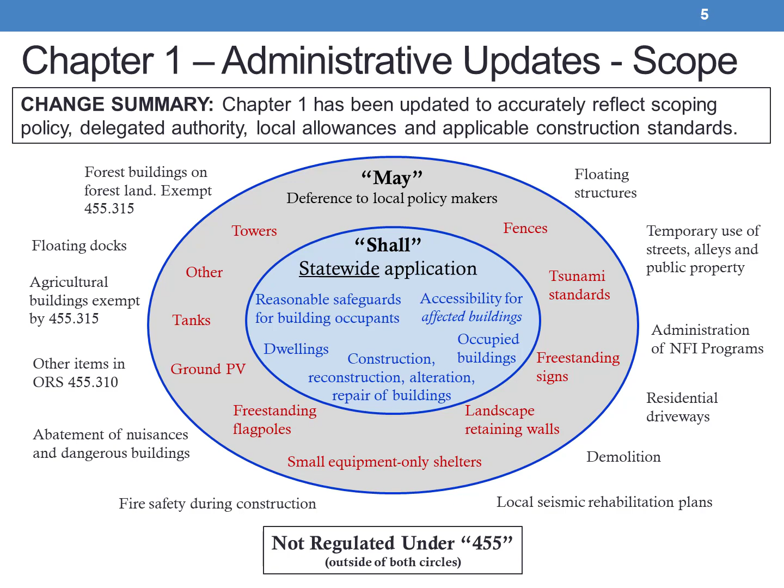It's important to note that both the shall and the may categories here fall under the division's regulatory scheme. While providing for local delineation in the may category, all work identified in either of the two ovals must comply with the respective construction standards of the State Building Code. Items outside both ovals do not fall under the authority delegated by the division. This includes dangerous building ordinances, local seismic rehabilitation programs, demolition, and participation in NFIP.

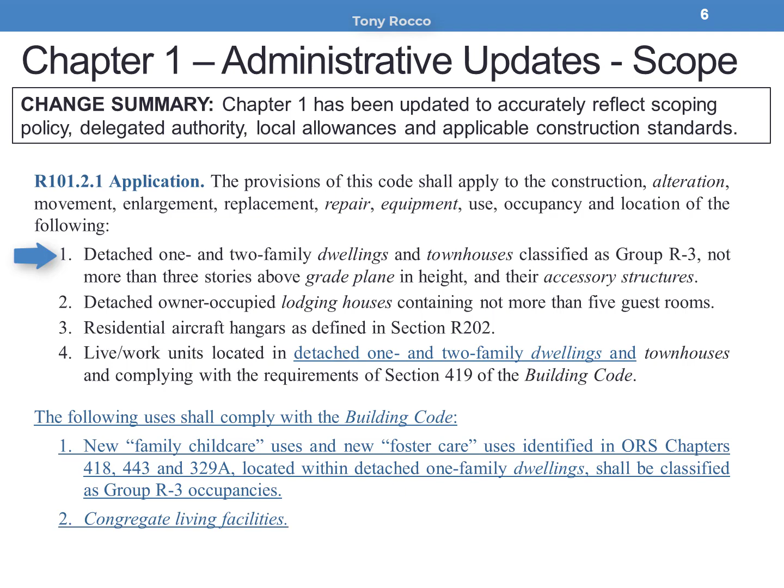As part of the Chapter 1 update, the scoping language has been revised. The ORSC governs detached 1- and 2-family dwellings and townhouses not more than 3 stories above grade plane in height, and their accessory structures. The definition of townhouse is particularly vital when considering its application.

Owner-occupied lodging houses with not more than 5 guest rooms. This use is also specifically covered by the exemptions from accessible design under public accommodations as defined in ORS 447.

Residential aircraft hangars. And live-work units located in detached 1- and 2-family dwellings and townhouses where designed to meet Section 419 of the Oregon Structural Specialty Code.

The following uses are required to comply with the OSSC and may not be constructed under the ORSC. Certified and registered child care facilities and foster care uses identified in Oregon Revised Statutes 418, 443, and 329A.

When permitted by licensure to be located in a detached 1-family dwelling, these uses shall be considered Group R3 under the OSSC application. And congregate living facilities.

These facilities would be assigned the occupancy classification they most nearly resemble based upon the proposed use. Congregate facilities may include various Group R or Group I divisions.

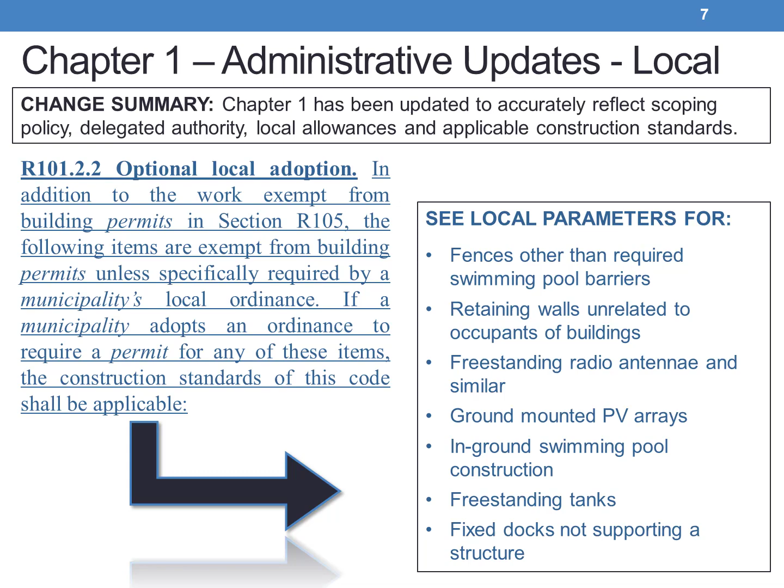but may not be reasonable in a rural area of our state. The intent is to provide local flexibility for addressing community-specific needs as determined by local policymakers and local elected officials.

A significant change occurs in section R102.7 and the creation of new subsection R102.7.2 regarding repairs. This subsection is intended to align the ORSC more closely with the long-standing OSSC code path for the correction of damage

for legally existing buildings. A critical consideration is that the owner of the ORSC governed structure, which was a victim of damage, will have a level of reasonable flexibility to consider when preparing to correct the damage.

Within that reasonable flexibility, specific minimum safeguard elements are required to be included where necessary. The overarching key is that the repair activity cannot make the building any less conforming than the building was prior to the repair activity being undertaken.

Standard and routine repairs, which are exempt from permit, are appropriately covered by section R105.2.2 and are not contemplated by this section. This section covers those repair activities which would require building permits and involvement by the local jurisdiction.

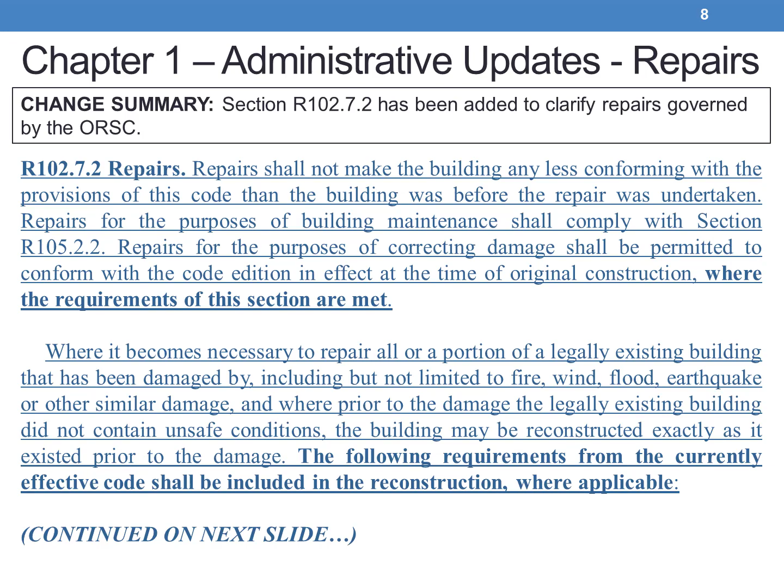Repairs for the purposes of correcting damage shall be permitted to conform to the code in effect at the time of original construction where the requirements of this subsection are met. The subsection then lists requirements from current code to be included in the repair activity as applicable.

The 8 items listed must be considered in the damage correction. Repair to replace structural elements must comply with the loading and design criteria set forth in Chapter 3, or to the maximum extent practical as further approved by the building official.

Smoke alarms in accordance with Section R314, CO alarms in accordance with Section R315, guards and window fall protection in accordance with R312, hazardous glazing locations in accordance with R308, emergency escape and rescue openings in accordance with R310.

energy compliance via the existing Chapter 11 path, and floodplain construction requirements where determined by the floodplain administrator.

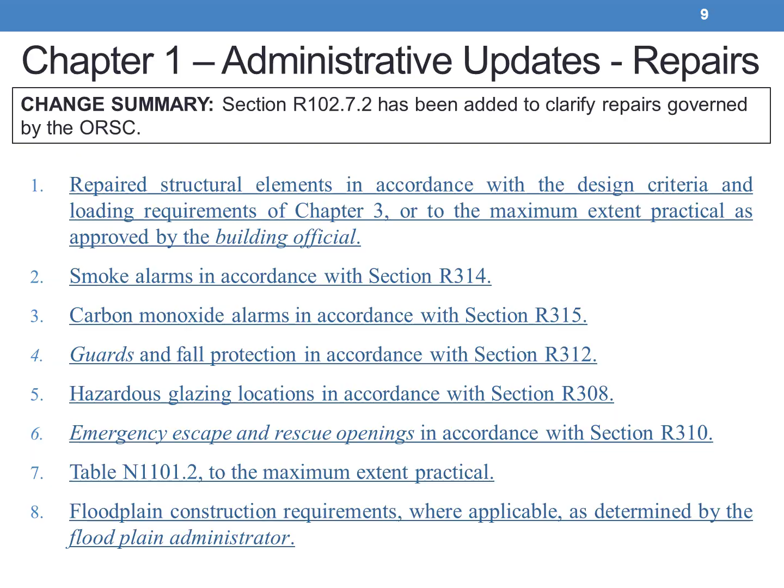Where one or more of these items is not in play based on the proposed work of the repair, it is not required to be provided in the damage correction. Such repairs are not required to conform to other new construction requirements.

Where unsafe conditions existed prior to the damage occurring, the building official has the authority to make all determinations regarding correction of those unsafe conditions.

The majority of significant repair and/or reconstruction of ORSC-governed structures may be guided by considerations well outside the state building code, such as insurance or desired homeowner modifications.

Where modifications are planned by the owner, the compliance path for alterations would apply to all elements modified from the original legally existing design.

The intent of this provision is to ensure that safeguards of current code are provided in the design while allowing for some design flexibility for those victims of damage.

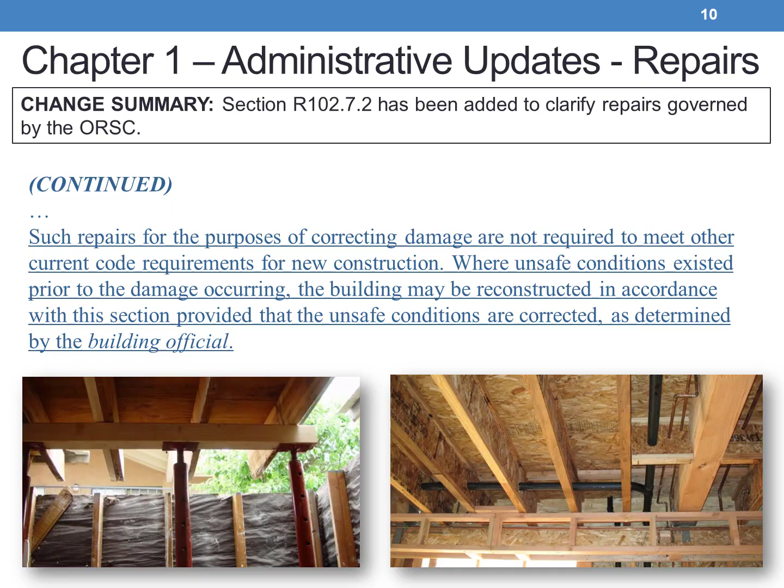The long-standing statutory exemption of ORS 455.310 regarding non-bearing partitions and its inclusion in the list in section R105.2 of the ORSC has led to misapplication and customer delays.

This new language is intended to clarify that when a new habitable space, toilet, or bathroom is created, a building permit is required to verify the design and dimensional requirements of the ORSC are met. This applies regardless of whether or not the non-bearing partitions qualify as exempt under section R105.2.

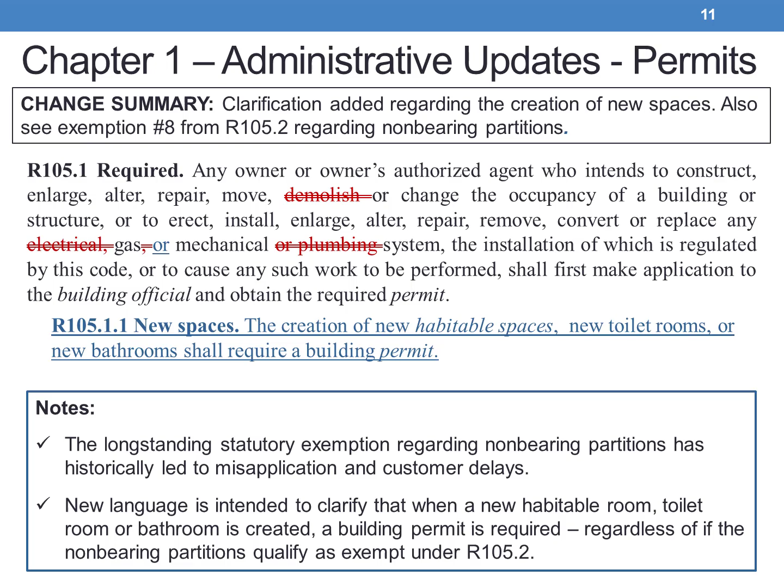Section R105.2 details work that is exempt from building permits. Based on the scoping policy alignment covered previously, the list in R105.2 has been adjusted accordingly.

Clarifications have been added regarding reroofing and other items on the list, and I recommend taking a closer look at all of the updates to the subsection.

On this slide, first we see the reoccurring language listed in the charging provision regarding the ability for municipalities to enact their own ordinances. This language occurs throughout the chapter as a reminder of broad local authority where not preempted by the provisions of the state building code.

We also see a helpful pointer here back to the scoping language in R101 and those optional local adoption matters for unoccupied structures such as fences and landscape retaining walls.

In the 2017 ORSC, Exemption 1, which is arguably the most popular exemption, was modified. This modification changed the height measurement to a wall height.

Under this ORSC, the wall height measurement has been adjusted to more closely align with common land use limitations and with how we typically measure building height under the ORSC.

This language also puts a limit on the overall structure height, whereas the wall height measurement did not.

This measurement is now specified as a maximum of 15 feet from grade plane to the average height of the highest roof surface.

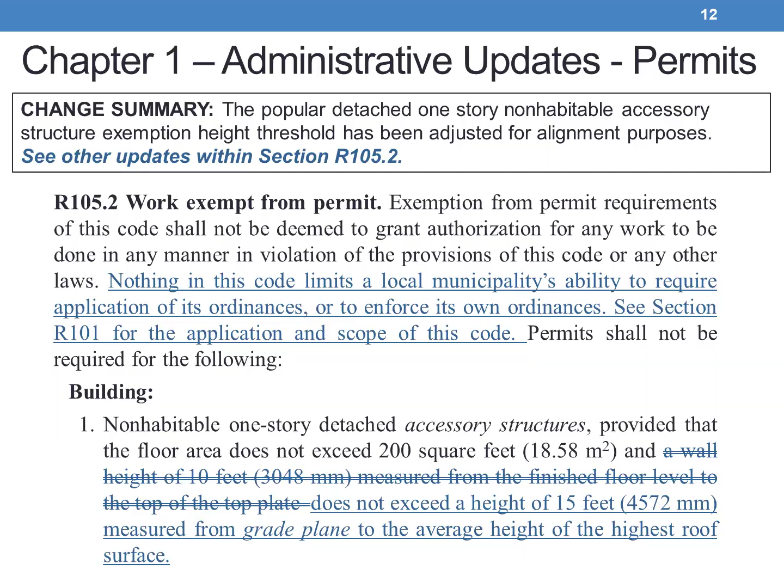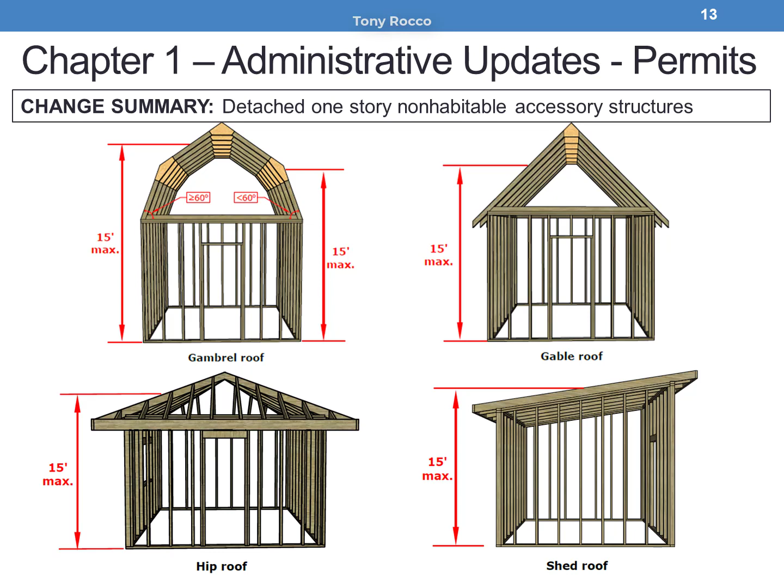Eric from our team created the following illustrations to show examples of this 15-foot maximum measurement. Notice that the measurement goes from grade plane to the average height of the highest roof surface.

When dealing with a gambrel roof, notice that the consideration of the 60-degree angle and the definition of exterior wall is identified.

Also remember that the application of this exemption only contemplates detached, non-habitable accessory uses.

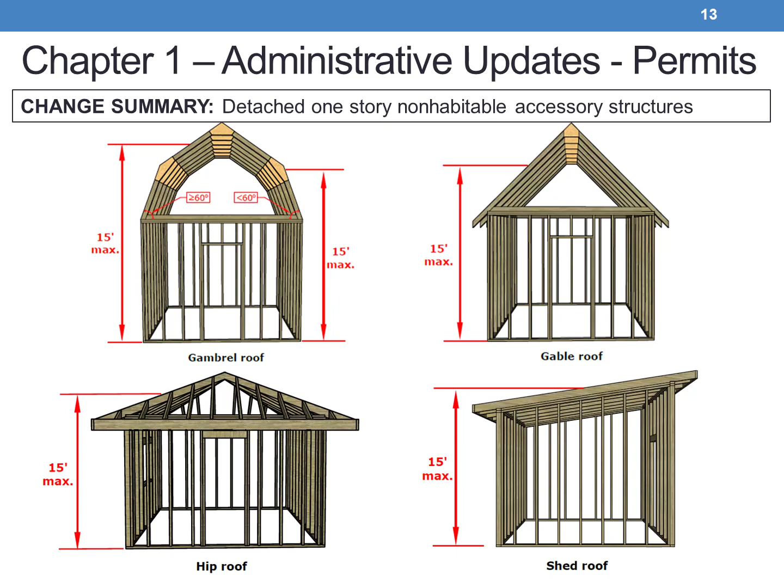Section R106.1 details the requirements for submittal docs. This is a commonly misapplied section of code, and it ties back to the exempt structure considerations of governing statutes.

First, in Oregon, construction documents are only required to be prepared by a registered design professional where their associated licensure laws specify. Any and all questions regarding architects and/or engineers' laws should be directed to OBAE or OSBEELS, respectively.

Exception number 2 has been clarified to align with the governing licensure and exempt structure laws of Oregon. Take a close look at Exception 2 and note the strikeout language.

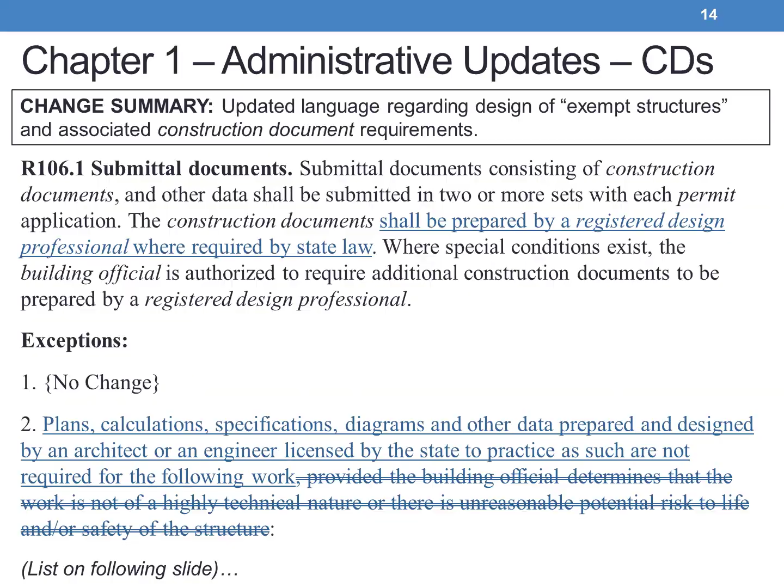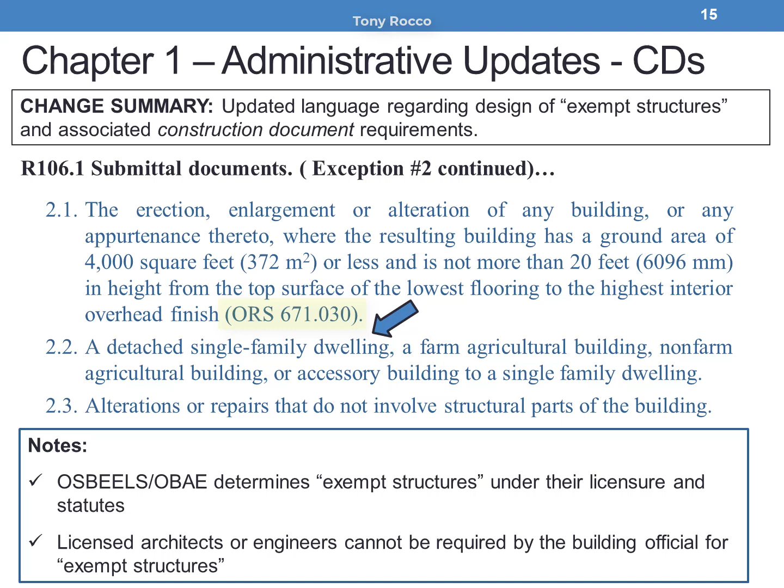In Item 2.1, note the alignment with ORS 671.030 and the pointer back to statute. Item 2.2 is of significance in the context of the ORSC.

Note that this exception is for a, quote, detached single-family dwelling or accessory building to a single-family dwelling. The key consideration here is that a licensed architect or engineer cannot be outright required by a local building official for those structures considered exempt, including a detached one-family dwelling or accessory buildings thereof.

The last slide touching on this change outlines general information shared previously with local government partners regarding this understanding. You may want to take a moment here to pause the presentation so that you can read the language on the screen.

Of note, while a local building department does not have the authority to overrule registered design professional licensure exemptions, they do have the authority to require any and all documentation necessary to ascertain code compliance during the plan review of construction documents.

Where a design of a single-family residential dwelling is not entirely prescriptive, ORSC Section R301.1.3 may be cited to require a design in accordance with accepted engineering practice.

This design would be required to the extent that the non-conventional elements of the design affect the conventional performance of the prescriptive design elements.

Section R301.1.3, Engineered Design. This Oregon amendment is intended to clarify whether an engineered design should be referencing the ORSC or the OSSC for the structural design criteria. This new language clarifies that the minimum live loads listed in Section R301.5, roof load provisions in Section R301.6, and deflection limits in Section R301.7 are to be used, and that all other structural design requirements necessary to complete the design shall be in accordance with Chapter 16 of the OSSC.

For example, consider a multi-level exterior deck that falls outside the prescriptive limitations of Section R507. Although Table 1607.1 of the OSSC now requires a minimum of 60 pounds per square foot for residential decks, this amendment clarifies that the 40 pounds per square foot value from Table

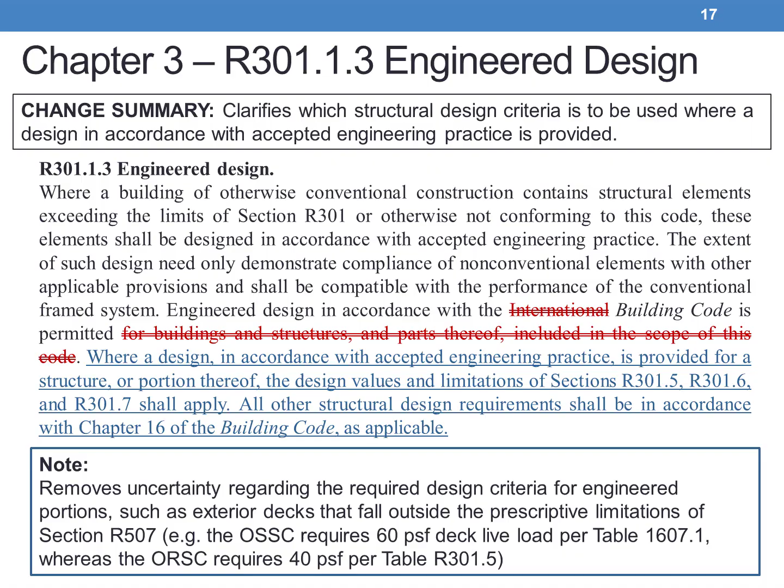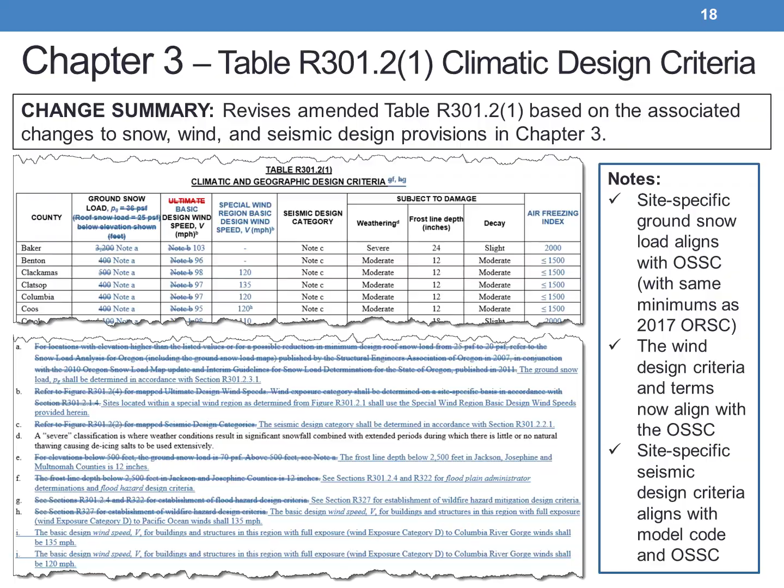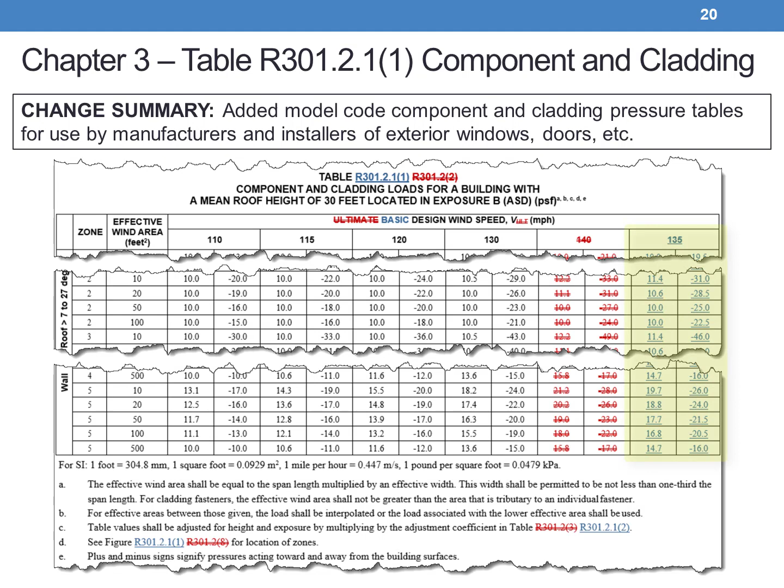Table R301.2.1(1), component and cladding loads for a building with a mean roof height of 30 feet located in exposure B. This newly adopted model code table provides the baseline component and cladding pressures for each zone identified in Figure R301.2.1(1). Note that the design wind speed terminology has been amended in this table for consistency, and the 140 miles per hour pressures have been replaced with 135 miles per hour pressures as an Oregon amendment for user convenience. For reference, the pressure zones identified in Figure R301.2.1(1), are based on prior versions of ASCE 7's component and cladding wind provisions.

Depending on the actual mean roof height of a particular project and the actual wind exposure for the site, the component and cladding pressures from Table R301.2.1(1), are required by footnote C to be multiplied by the height and exposure adjustment coefficients from Table R301.2.1(2).

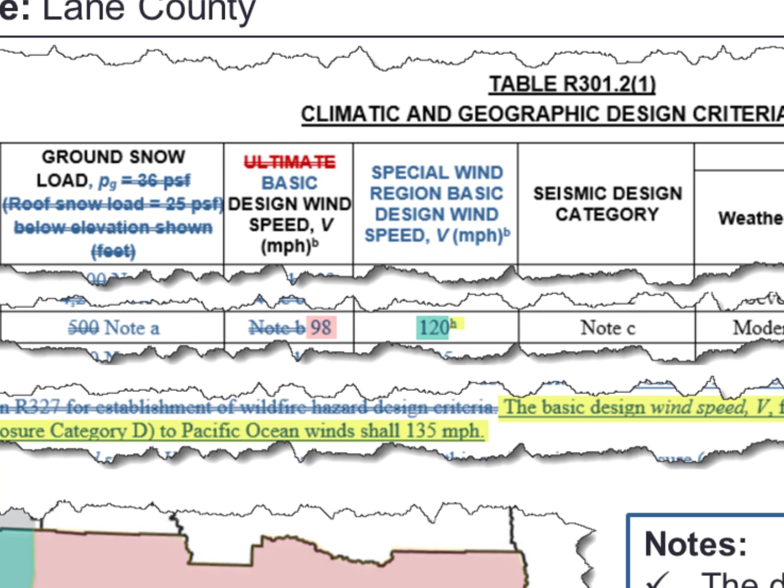Here are a few examples that showcase the changes to the basic design wind speed determination and associated verification of special wind regions. In Lane County, you see that the basic design wind speed is now 98 miles per hour for all areas outside the identified special wind region.

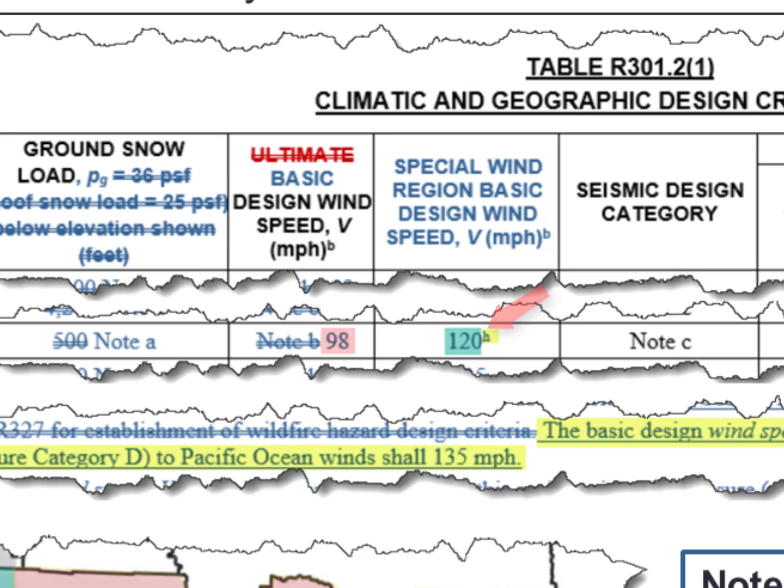This area and wind speed is shaded pink in this example. And the basic design wind speed within the identified special wind region is 120 miles per hour, which is shaded green in this example. See that footnote H further identifies that areas within that region along the Pacific coast having exposure category D shall use a basic design wind speed of 135 miles per hour.

Note that both the 120 and 135 mile per hour wind speeds provided here are the same as the 2017 ORSC speeds for these areas of the county.

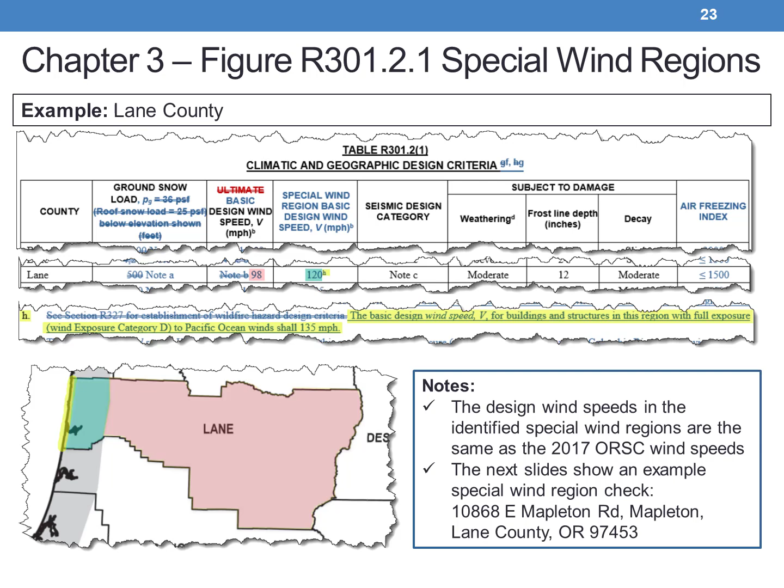Now let's look at a specific site address in Lane County that's near the transition between the pink shaded region and green shaded special wind region. The example address is at 10868 East Mapleton Road in Mapleton, Oregon.

To verify whether this address is inside or outside of the special wind region, we access the ATC Hazards by Location tool using the listed web address from footnote A of the special wind region figure. Note that the user has the option of entering latitude and longitude or address. Once the address or coordinates are entered, select the Wind tab and click Search.

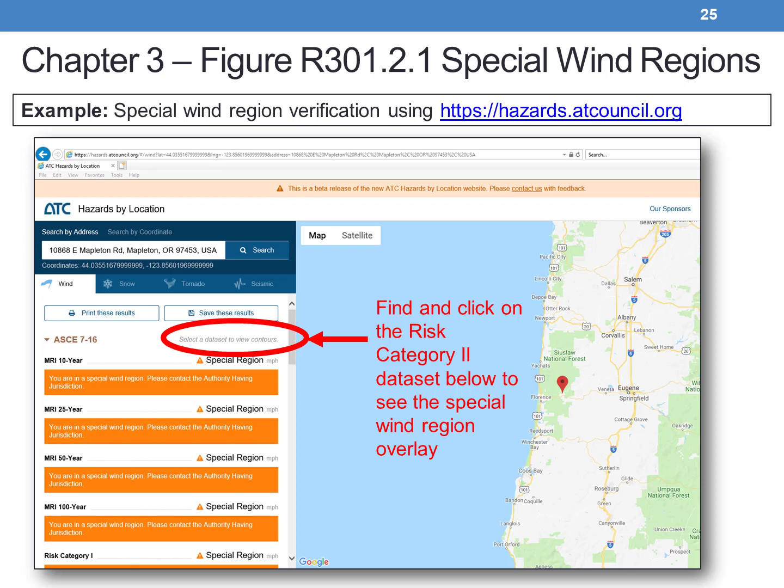Next, you'll see a dynamic map of the area on the right side of the screen and wind information provided on the left side, with a note to select Dataset to view contours. Make sure you stay within the ASCE 7-16 dataset and scroll down to Risk Category 2 and select it. If a special wind region area exists in the dynamic map, it will appear as a shaded overlay, allowing you to verify whether the site is inside or outside of the special wind region.

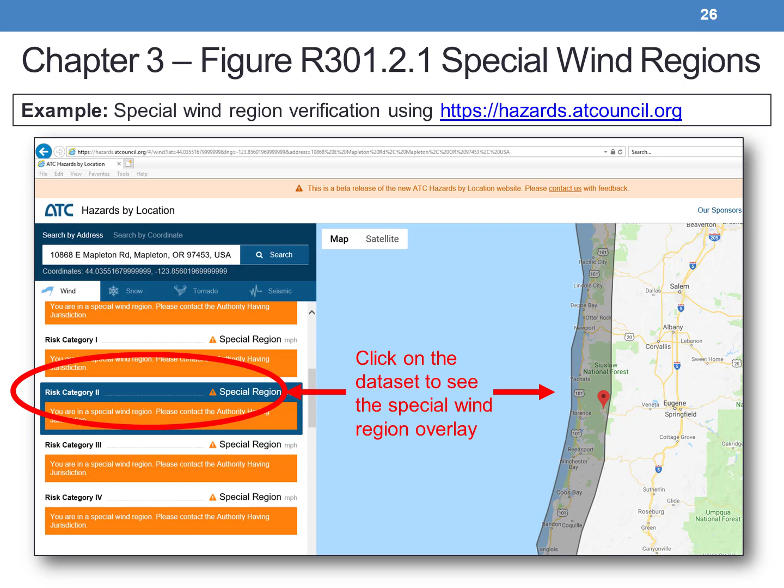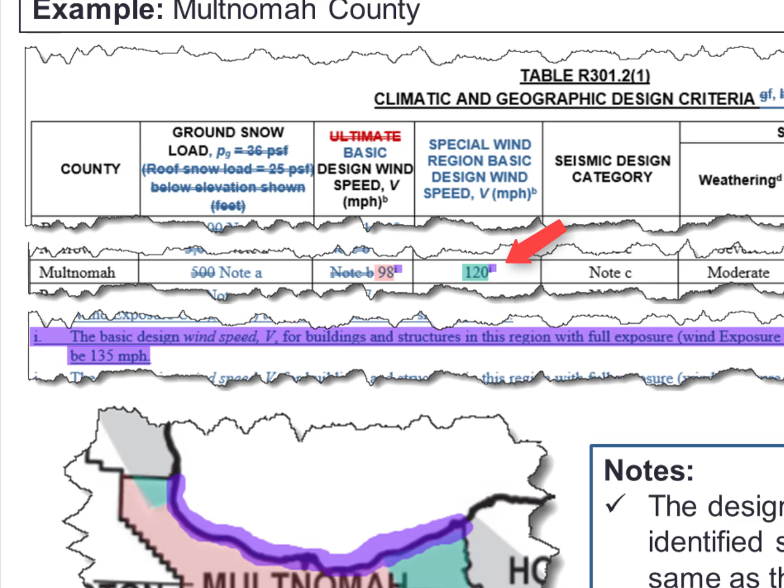And the basic design wind speed inside the identified special wind regions is 120 miles per hour, which is shaded in green. See that footnote I further identifies that areas within that region along the Columbia River having exposure category D shall use a basic design wind speed of 135 miles per hour.

And lastly, note that both the 120 and 135 mile per hour wind speeds provided here are the same as the 2017 ORSC speeds for these areas of the county.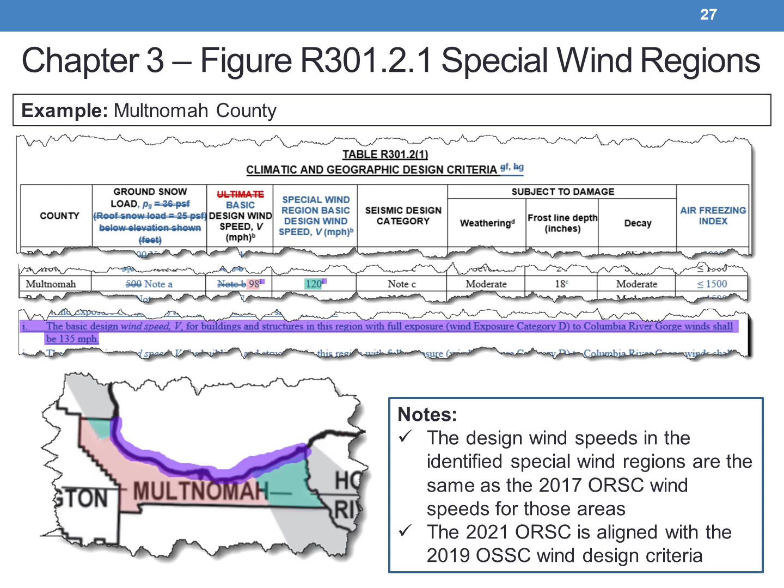This last example for special wind regions is in Wasco County. You see that the basic design wind speed shaded in pink is now 99 miles per hour for all areas outside the identified special wind region.

And the basic design wind speed within the identified special wind region is 110 miles per hour, which is shaded in green in this example. See that footnote J further identifies that areas within that region along the Columbia River having exposure category D shall use a basic design wind speed of 120 miles per hour.

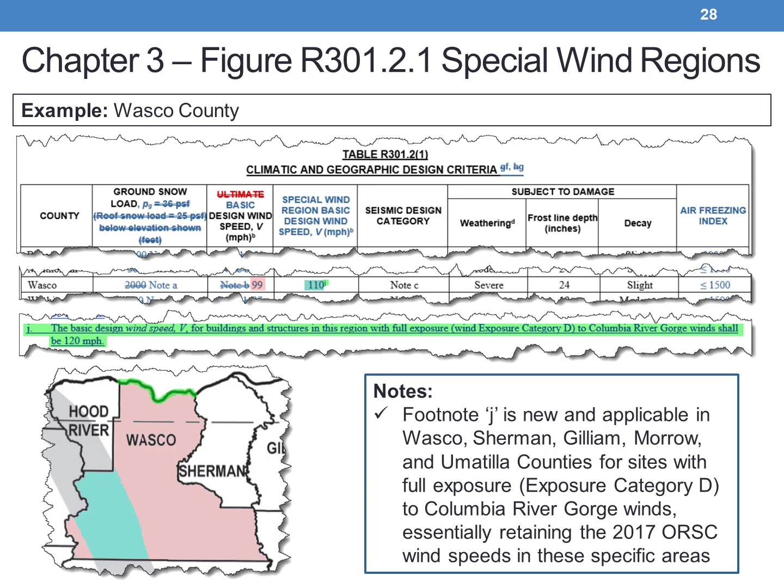Note that both the 110 and 120 mile per hour wind speeds provided here are the same as the 2017 ORSC speeds for those areas of the county.

Section R301.2.2, Determination of Seismic Design Category. This change replaces the outdated Oregon Seismic Design Category map with this latest model code figure.

The model code figure has been amended to only include Oregon, and a note has been added to require sites on the perimeter of the identified seismic design categories to be verified using the Applied Technology Council's Hazards by Location tool. Note that this is the same tool that is now referenced in the code to verify special wind regions.

As you can see, this is a significant change from our historical map, introducing seismic design categories B, D0, and E to areas of the state. But note that this change aligns the ORSC and OSSC for seismic design categories of Risk Category 2 structures.

Note that this map will show seismic design categories in shades of gray in the ORSC, but is provided here in color for clarity.

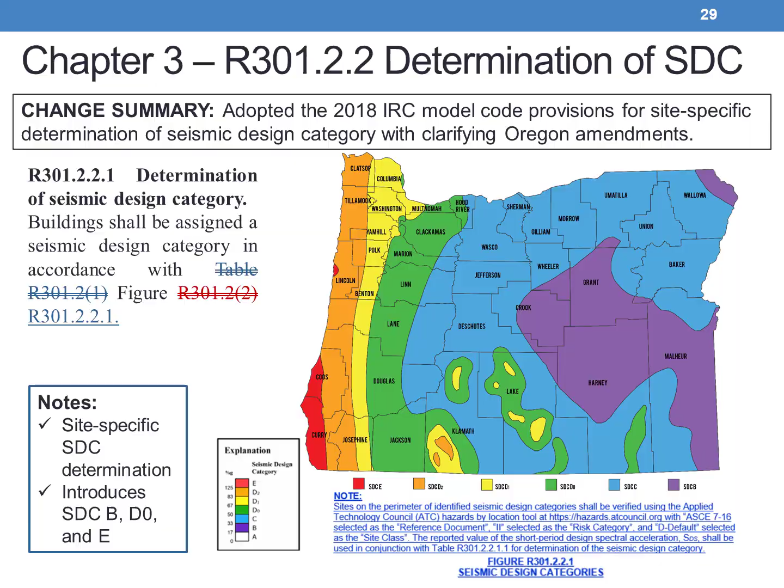Section R301.2.2.1.2, Alternative Determination of Seismic Design Category E.

Although these provisions have remained unchanged from the 2017 ORSC, it's important to discuss here because they hadn't been applicable in the past, but now are in areas of Lincoln, Coos, and Curry counties, as seen in Figure.

R301.2.2.1. Remember that per section R301.2.2, it states that buildings in seismic design category E shall be designed to resist seismic loads in accordance with the building code, except where the seismic design category is reclassified to seismic design category D2 per this section.

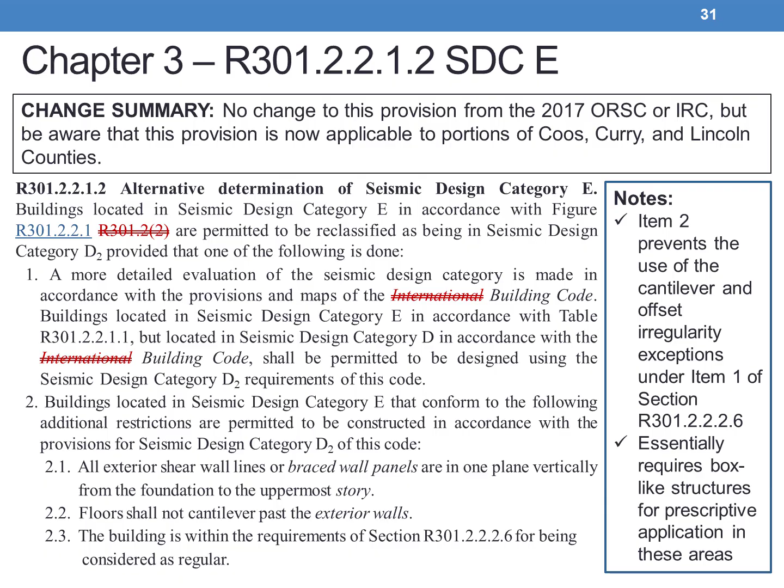Section R301.2.3.1, Ground Snow Load. This new subsection is a direct reference from footnote A of Table R301.2 parenthetical 1, Climatic and Geographic Design Criteria, and aligns the ORSC with the OSSC for site-specific ground snow load determination.

This is the same procedure as outlined in Section 1608.2.2 of the 2019 OSSC, sending us directly to the online lookup tool and requiring adjustment to the reported value where required. Note that ground snow load is the only parameter used by the ORSC for prescriptive design, and Section

R802.10.2.1, Applicability Limits for Engineered Wood Trusses, is the only reference to roof snow load in the ORSC. And that section states, quote, "For consistent loading of all truss types, roof snow load is to be computed as 0.7 times ground snow load," unquote.

Note that 0.7 times 36 pounds per square foot ground snow load is equal to 25 pounds per square foot. The minimum snow loads listed are consistent with our historic minimums in Oregon and provide direct values to be used for prescriptively built homes utilizing lumber rafters or engineered wood trusses.

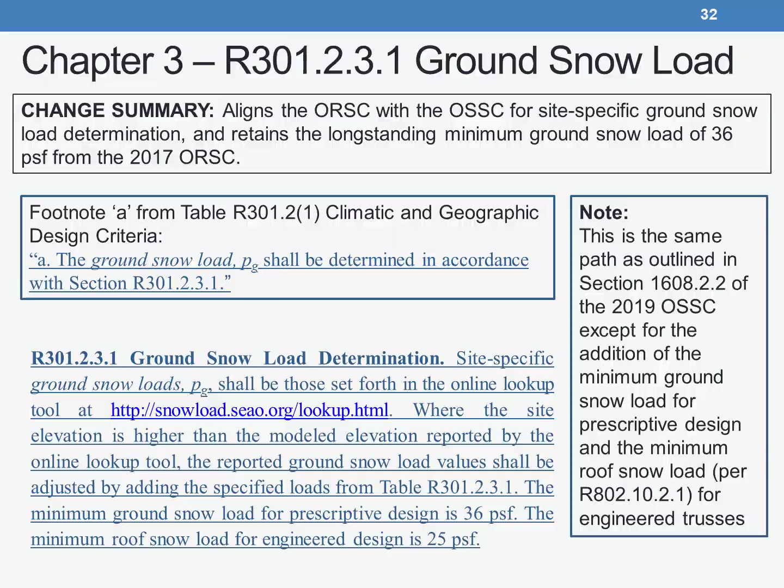The ground snow load adjustments from Table R301.2.3.1 are the same as those provided in Section 1608.2.2 of the 2019 OSSC, and are only required to be used when the actual project elevation is higher than the ground snow load elevation reported by the online lookup tool.

Although there is no codified map identifying the extents of these 7 regions, a designer or code official could overlay a national or state-produced ecoregion map to confirm which region a specific project site is within.

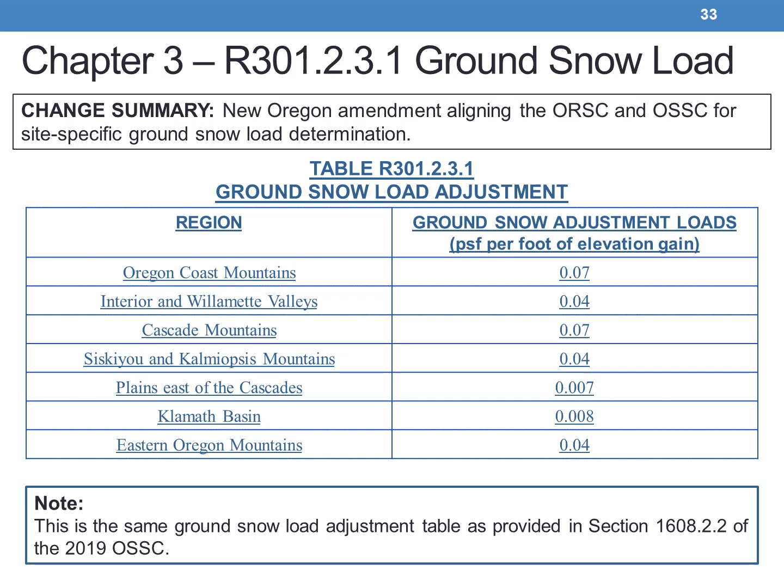Here's an example ground snow and associated adjustment determination for a particular address in Newberg. There are some areas of the state, usually near steep terrain, where the modeled elevation reported by the online lookup tool is substantially lower than the actual project elevation.

Note that for this example, the actual site elevation is higher than the modeled elevation, which means ground snow load adjustment is required. If the modeled elevation were greater than or equal to the actual site elevation, no adjustment would have been needed.

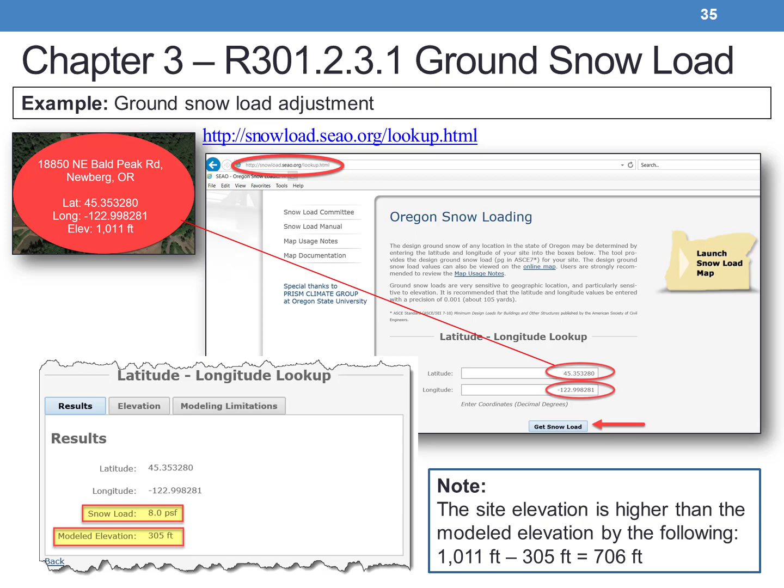The adjusted ground snow load is obtained by adding the ground snow load reported by the online lookup tool to the product of the regional adjustment load multiplied by the difference between the actual and modeled elevations.

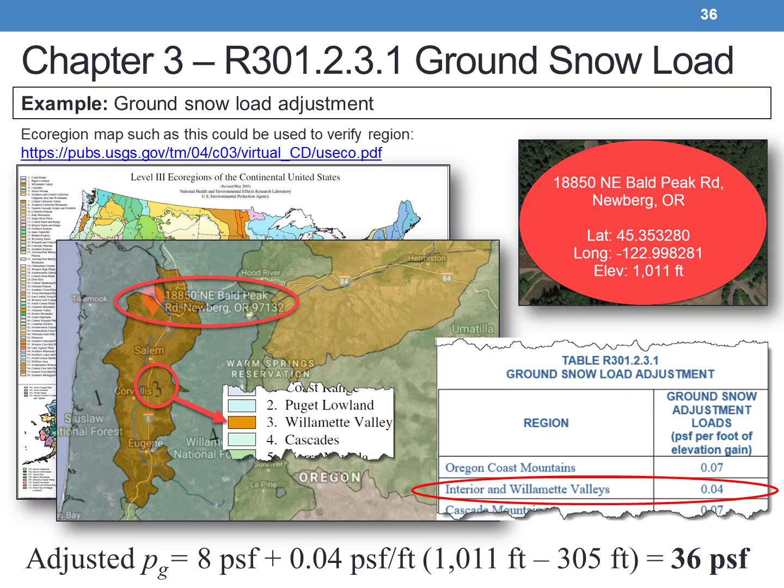Section R302.1 has been updated to clarify several long-standing application questions, and our team is excited about these changes. First, minimum fire separation distances must be established independently where local land use laws permit more than one detached 1

or 2 family dwellings to be located on a single lot. A critical consideration here is that the term ADU is not a technical term recognized by the state building code.

Where an additional detached structure meeting the definition of dwelling unit is permitted to be added to an existing lot, R302.1 will now address the application more directly.

Next, we have a clarification regarding attached decks and consideration as a projection of the dwelling for the purposes of establishing fire separation distance or protected construction. And finally, a clarified minimum nominal thickness regarding the fire blocking footnote allowance of the table. Let's take a closer look at these changes.

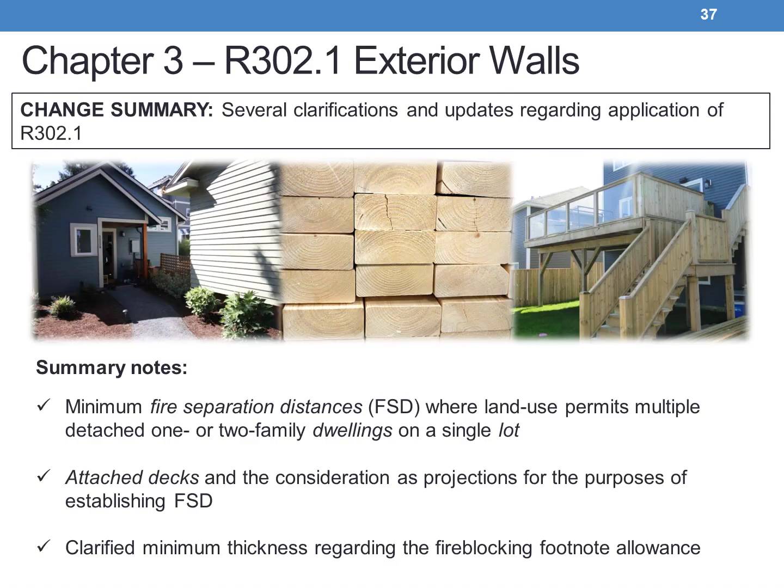The charging language of section R302.1 now includes a new sentence: where multiple detached dwellings are located on a single lot, each detached dwelling shall comply independently with table R302.1.

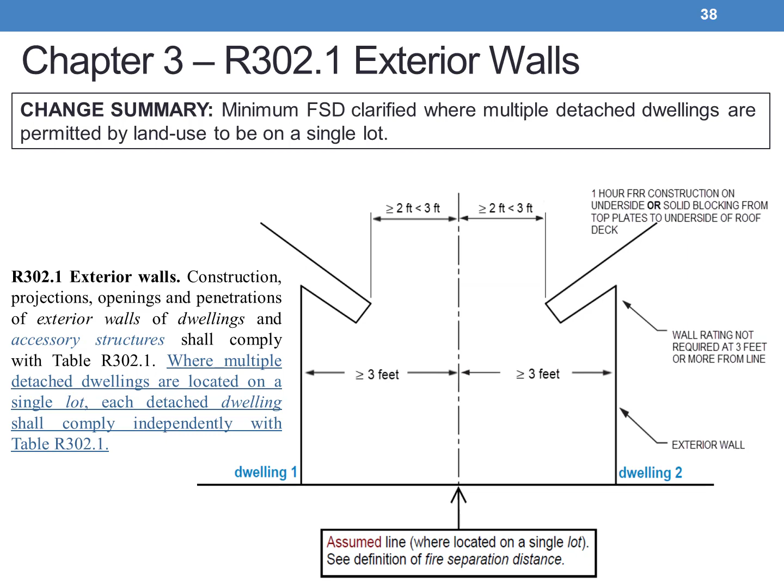The figure and the definition of fire separation distance may be helpful references here. Where these two detached dwellings are permitted on a single lot, our approach mimics the long-standing buildings on the same lot approach we are familiar with from the OSSC. We either assume an imaginary line between the structures to establish our minimum fire separation distance independently for each structure, or we provide fire resistance rated construction where required, which may be on one or both sides of that imaginary assumed line.

Note the new exception to this charging language of R302.1 and the new definition of attached decks. The exemption clarifies that attached decks, which are exempt from building permits by section R105.2, are exempt from R302.1 and compliance with the associated table. All other attached decks are considered projections for compliance with table R302.1.

The definition is reproduced from the OSSC and details this element as an exterior floor system supported on at least one side by the exterior wall of the adjoining structure and supported on the opposing side by posts, piers, or other support methods.

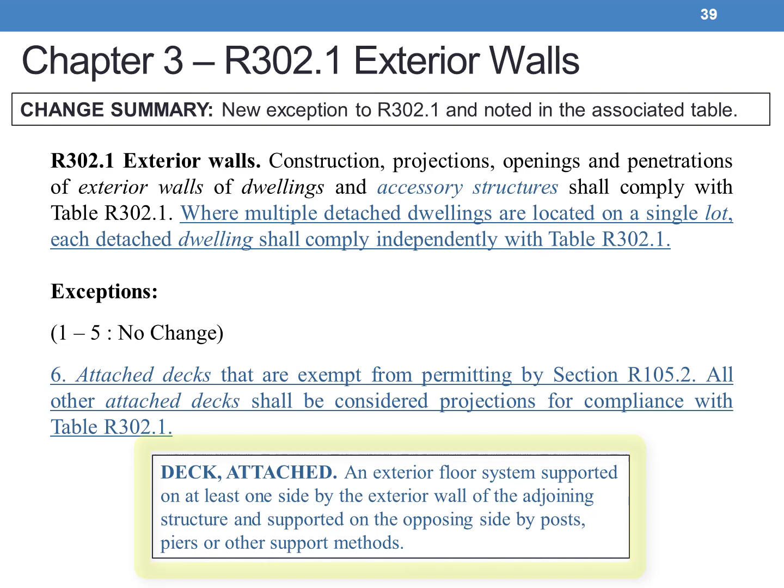Section R302.2.1 Townhouse Firewalls. This is an editorial change that's clarifying that under certain conditions, plumbing and mechanical are allowed within the cavity of a modified common 2-hour townhouse firewall. As you can see in item 2, the language indicates plumbing or mechanical equipment, ducts, or vents are not permitted in the cavity of a modified 2-hour wall. This language caused confusion, so for 2021, the underlined section is being added, except as specifically detailed in section

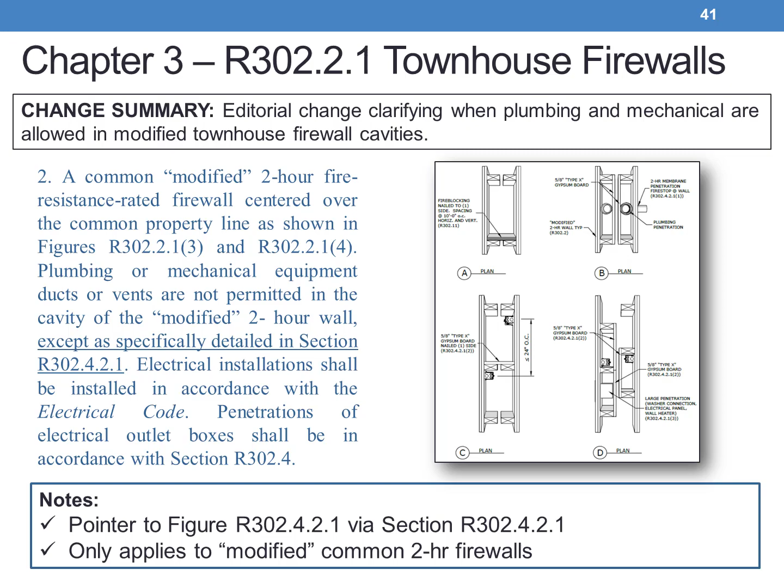Section R302.2.3 Townhouse Utilities. This is an editorial change that's reintroducing the townhouse utility separation provisions. These provisions were originally included in the 2014 ORSC, along with a maintenance agreement that was required to be approved by the building official. The maintenance agreement was deemed to be outside of the scope of the statewide building code and was removed for the 2017 ORSC. Inadvertently, the utility language was also deleted.

So for 2021, we're bringing back the utility separation language in section R302.2.3. What it does is it clarifies that any shared or common use utilities cannot run beneath any portion of the townhouse, and then further clarifies that each separate townhouse shall have its own utility services, and those utilities are not allowed to run through the attic of an adjacent townhouse or beneath an adjacent townhouse.

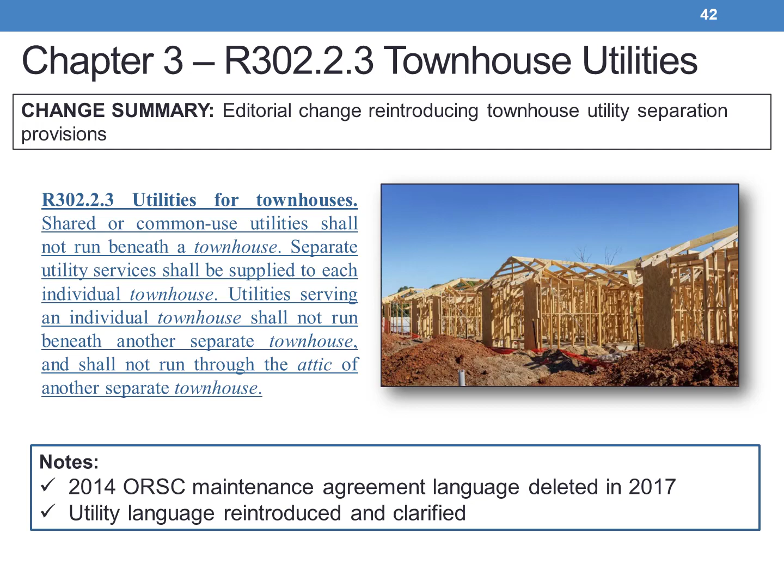Here's one of the best changes in the 2021 ORSC, if you ask me. A big thanks to Jonathan Balkema and OBOA for their engagement on this one.

We are in section R302.3, and we're talking 2-family dwellings. Historically, there has not been a codified path to address 2-family dwellings separated by a real property line.

As 2-family dwellings are becoming more popular, many building officials have worked with customers to establish an allowable local alternate to address these configurations. Essentially what we have are 2 zero-lot line dwellings with a minimum 1-hour ASTM E119 or UL 263 wall on each side of the property line. But the structural connection across the line was never directly addressed in the code. The new subsection...

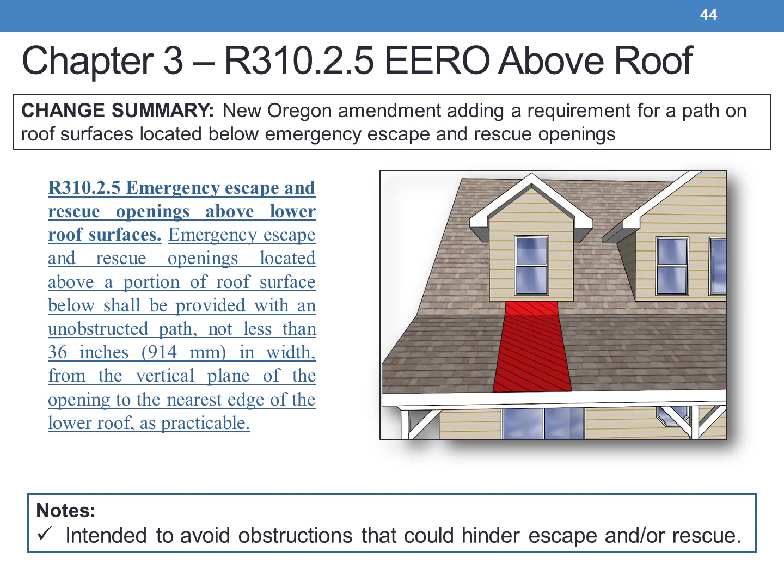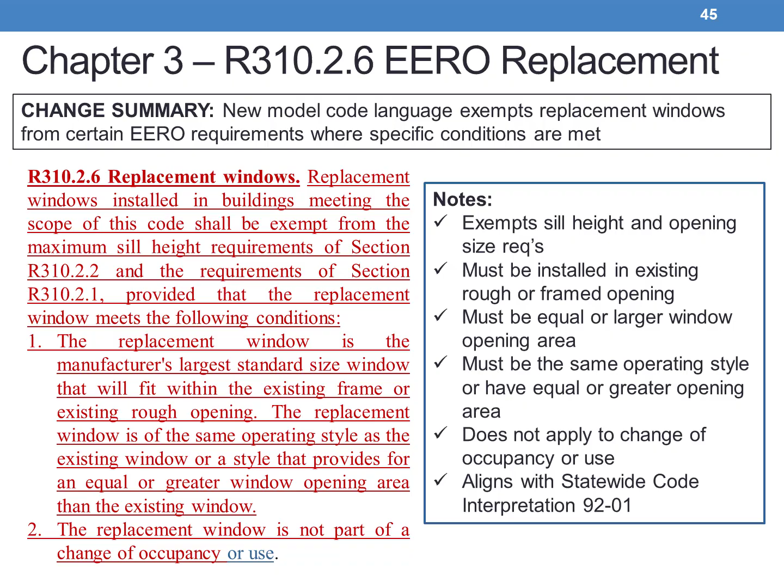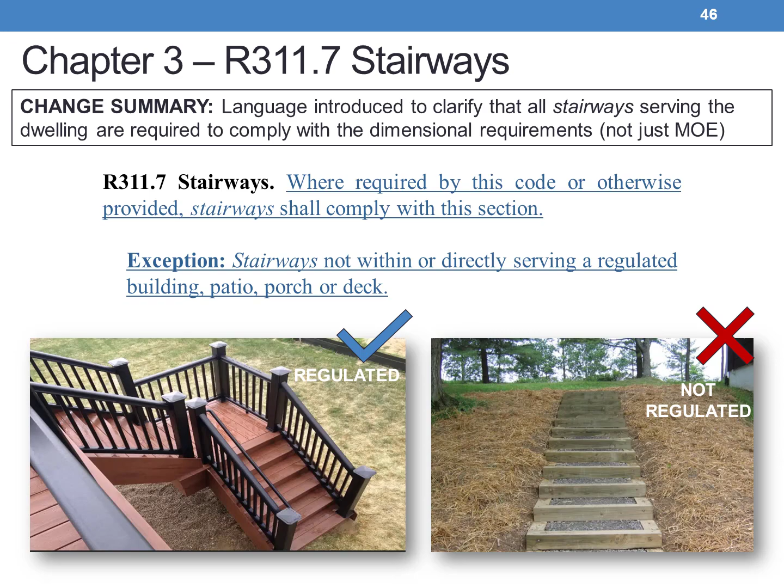The new language is intended to resolve a cited path for common deck stairs leading to a backyard, for example. See the image on the left. Under the 21 ORSC, these stairs are regulated. Under the ORSC from 2008 through 2017, only stairways that were an element of the required means of egress were citable.

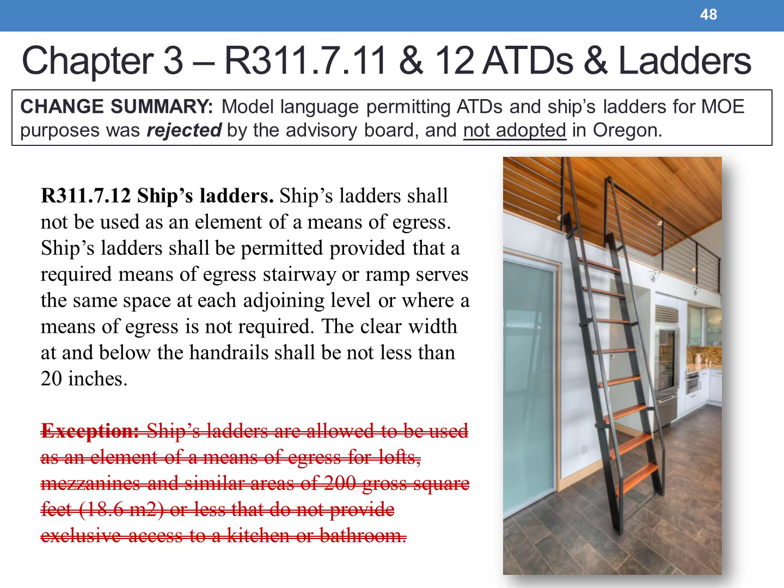As with alternating tread devices, these ladders may absolutely be used as an accessing means via the charging language of the existing provision. This existing charging language was first introduced into the 2017 iteration of the ORSC.

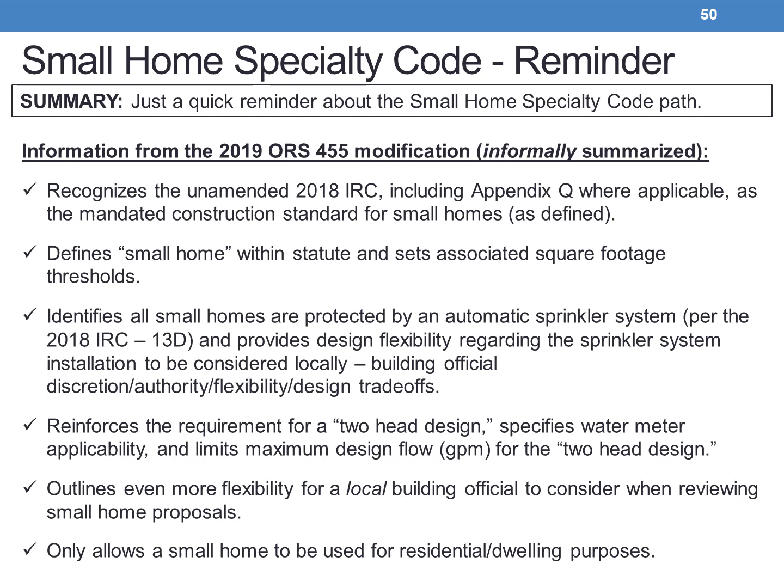It also provides design flexibility to be considered locally, referring to building official discretion, authority, flexibility, and design trade-offs. It reinforces and restates the requirement for a two-head design. It also specifies the water meter service size and limits the maximum design flow for that two-head design. It outlines even more flexibility for a local building official to consider when reviewing small home proposals locally as necessary to meet those community-specific needs. And it only allows a small home to be used for residential dwelling purposes.

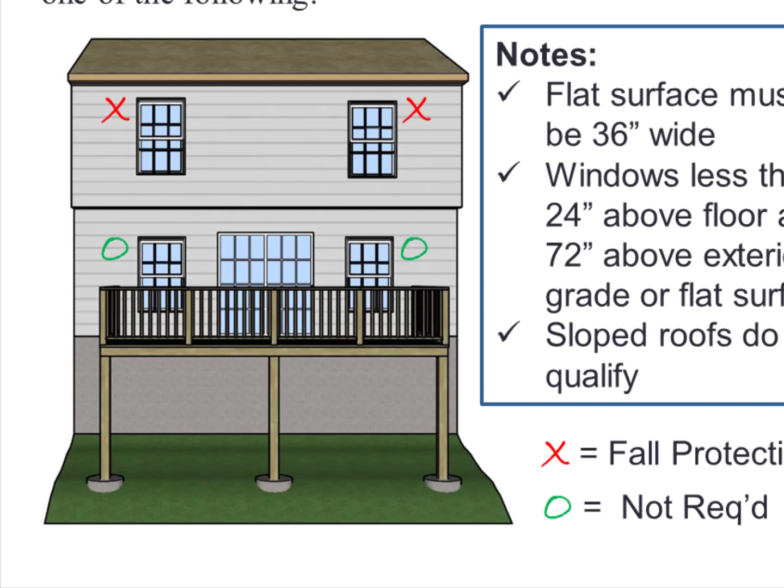If you look at the illustration on the left, you will see that the lower two windows have no requirement for fall protection. Even though the bottom of those windows may be more than 72 inches to the finished grade, they are less than 72 inches from the flat surface, which is the deck. The upper windows, assuming the bottom of those are more than 72 inches from the deck, would be required to have fall protection.

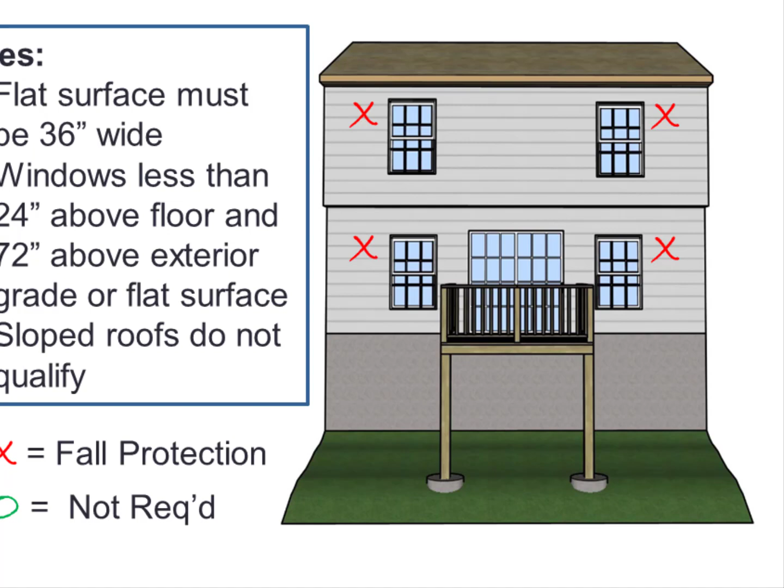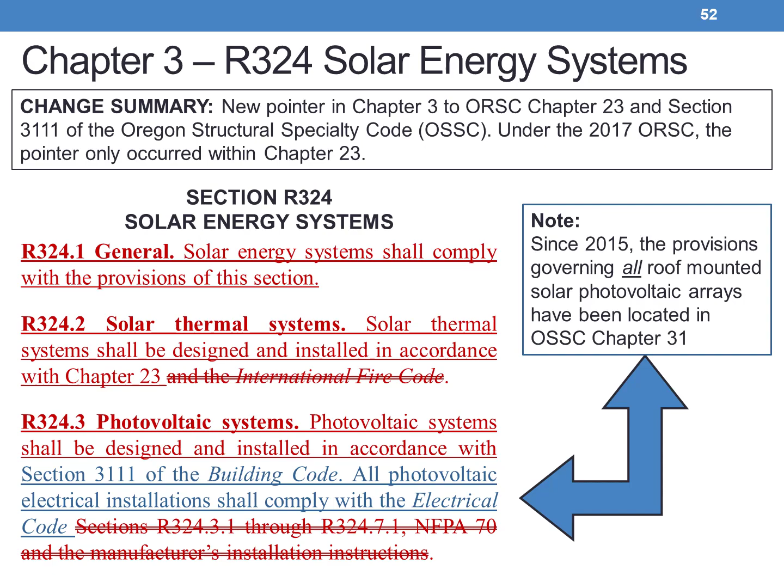From R312 all the way up to section R324 and solar energy systems. This new section details pointers for both solar thermal and PV systems and is a navigational provision in nature. As a reminder, since 2015, the provisions governing all roof-mounted PV arrays have been located in Chapter 31 of the OSSC. At that time, the governing advisory boards elected to incorporate the existing Oregon Solar Installation Specialty Code provisions into the OSSC and create reference from the ORSC for those ORSC-governed buildings. Under the 2017 ORSC, the pointer was located in Chapter 23. In the 2021 ORSC, the Chapter 23 pointer remains, and this additional navigational provision is added for clarity.

Section R326, Habitable Attics. These are new provisions added to the 2021 ORSC. However, the provisions in the concept are not new. They were originally added to the 2009 Model Code as a definition, but that definition was not adopted in Oregon. In 2018, the Model Code moved the provisions to Chapter 3. And then in 2021, the Model Code further refined the language as they discovered that the provisions were less restrictive than the IBC for Group R3 height.

The provisions in R326 do require minimum dimensions for the habitable attic space, floor area, and ceiling height as per Chapter 3. And it also establishes a habitable attic as a story above grade as a baseline. There are 4 exceptions that allow the space not to be considered a story above grade. Those are max floor area of a third of the story below, or it can go up to a half with an NFPA 13D system.

The occupiable space in the habitable attic has to have a roof assembly above, a ceiling assembly below, and knee walls, if applicable, on the sides. And the floor of the habitable attic cannot extend beyond the exterior walls of the story below. Where a habitable attic is above the third story, an NFPA 13D system is required in the structure, as this starts to exceed rescue capabilities from the exterior for the standard ladders that are carried by the fire service. There's also an associated definition in Chapter 2 for habitable attic: a finished or unfinished habitable space within an attic.

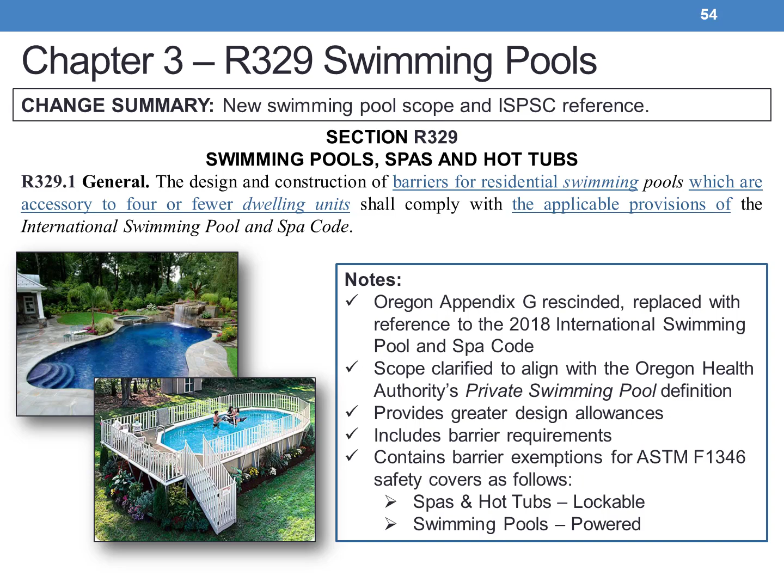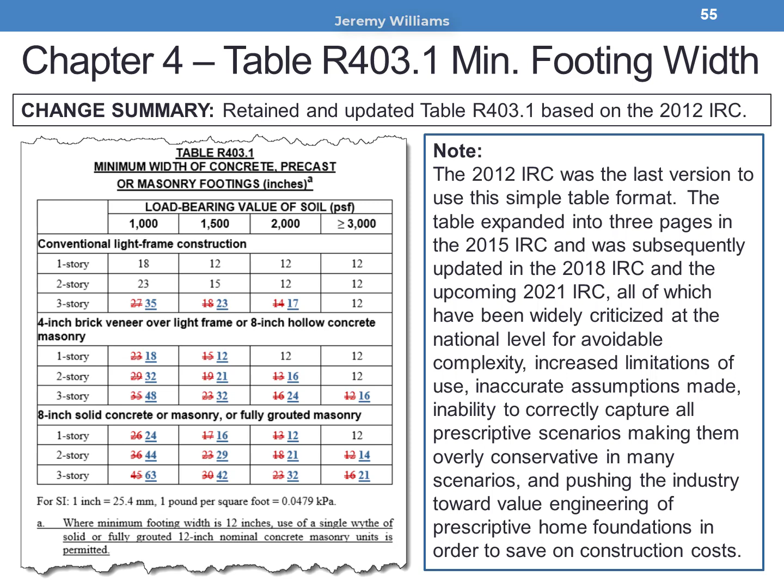Table R403.1, minimum width of concrete, precast, or masonry footings. Although the Code Adoption Committee and Board sought to align with model code in most instances, this table was expanded into 3 code pages of tabular data built on assumptions that were widely criticized at the national level for the 2015 IRC adoption. Although that change was approved for the 2015 IRC, substantial updates to that were made for the 2018 IRC, which was further criticized based on what was described as avoidable complexity, increased limitations of use, inaccurate assumptions made, and inability to capture some common prescriptive applications.

So the board recommended updating the 2017 ORSC table based on the last model code that used that form, which was the 2012 IRC. As you can see, there were no changes to the footing widths for conventional light frame 1-story and 2-story structures, but there was an increase to the footing width for conventional light frame 3-story structures. And for the other categories, including brick veneer over light frame and/or CMU or concrete walls, the 1-story footing width decreased, whereas the 2- and 3-story footing widths increased.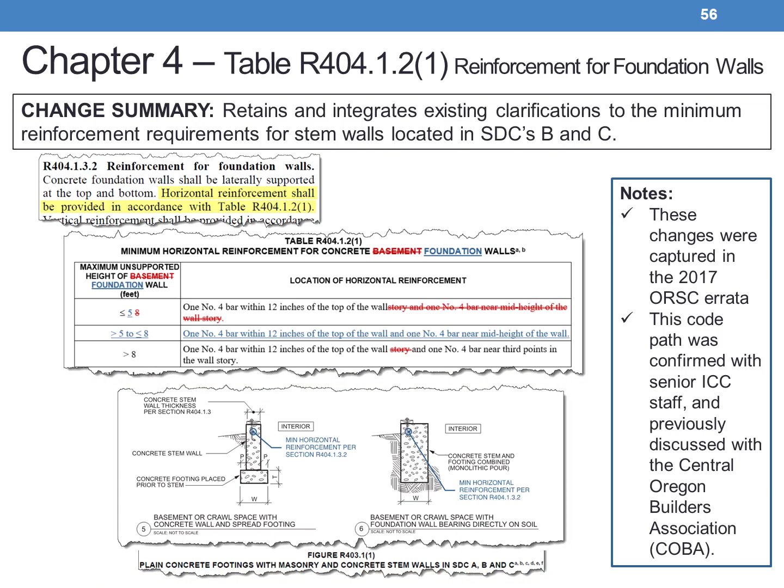Minimum horizontal reinforcement requirements for stem walls in seismic design categories D0 through D2 are specifically provided in section R403.1.3.1, but a similar provision for stem walls in seismic design categories A through C doesn't exist. After consulting with senior ICC staff, they confirmed that the amended table R404.1.2 parenthetical 1 and associated figure R403.1 parenthetical 1 meets the intent of the model code for minimum horizontal reinforcement for stem walls in seismic design categories A through C.

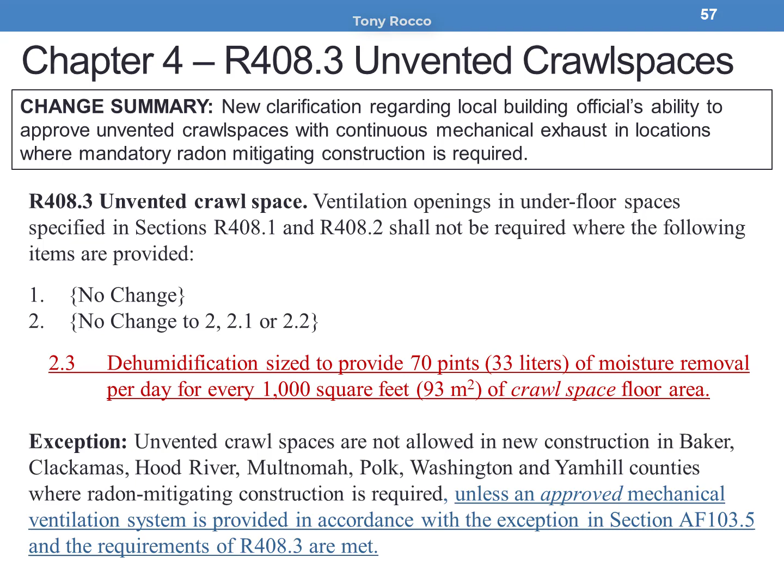Section R408.3 regarding unvented crawl spaces includes two changes. First, we have a model code addition recognizing dehumidification of the space as a potential design option in item number 2. The system requirement specified is 70 pint removal per day for each 1,000 square feet of unvented crawl space. The big change here is an amendment clarification within the exception.

One disconnect when the exception was first added is that an active or continuous mechanical radon mitigation system is a potential design option in Appendix F where approved by the building official. This new language simply opens up a potential design option for those customers desiring an unvented crawl design in a county subject to mandatory radon mitigating construction. The key here is the definition of approved and the requirement for site-specific local building official acceptance.

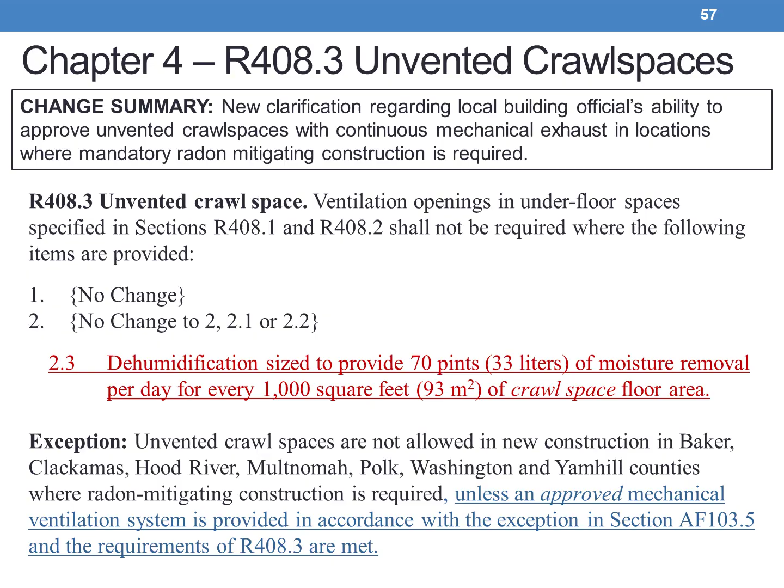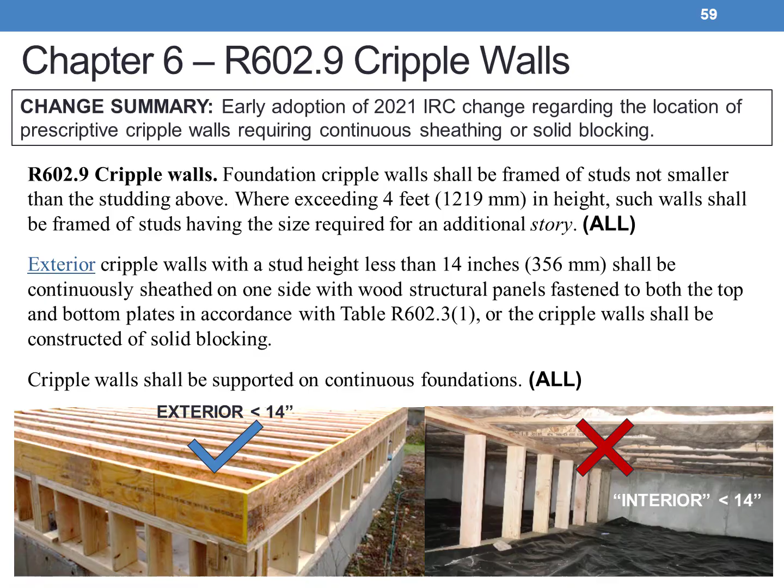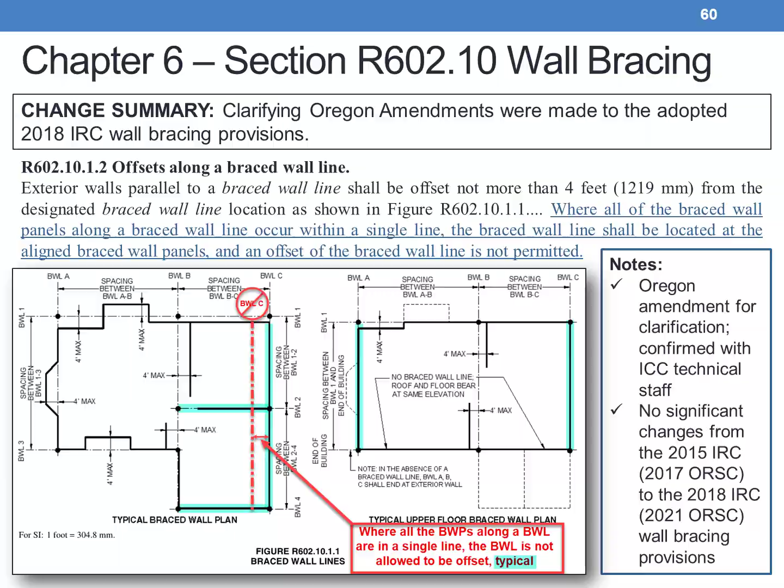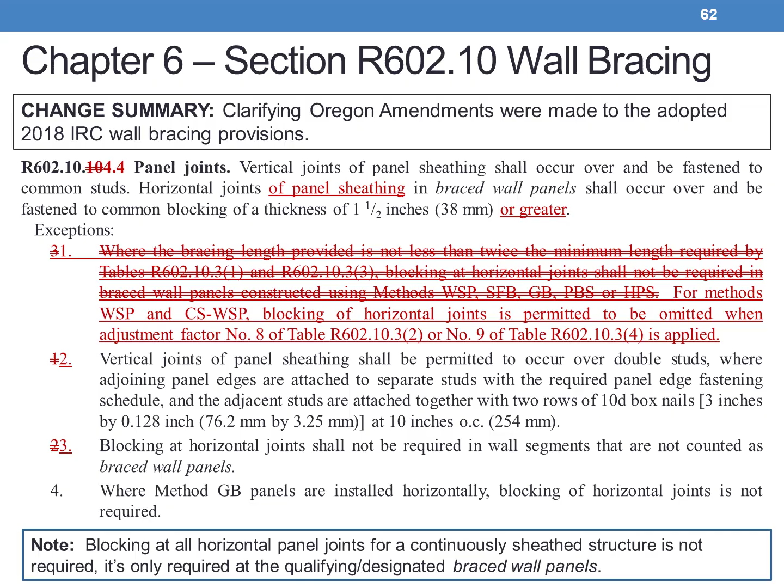Note that this section captures all brace wall panels utilizing panel sheathing, including continuously sheathed methods. It's important to note that for a continuously sheathed structure, horizontal blocking is only required at the qualifying and/or designated brace wall panels. All other areas of the structure required to be continuously sheathed for that method, such as above and below window openings, etc., do not require the horizontal blocking. For this reason, it's important that the plans clearly identify the qualifying or designated CS-WSP brace wall panel locations, such that the inspector is able to verify which portions actually require the horizontal blocking.

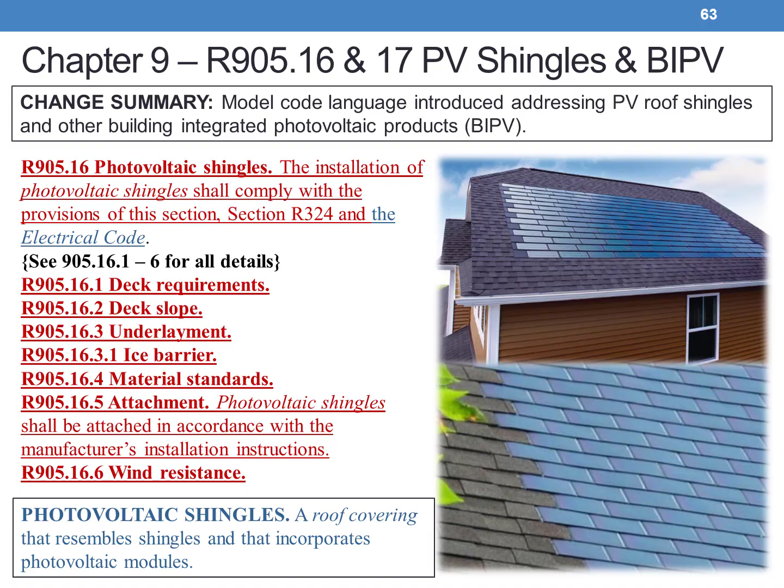Section R905.17 now includes a similar construct for building integrated PV roof panels. Note the references here back to R324, the electrical code, and the general subsection reference to the manufacturer's installation instructions. An associated definition for this product also appears in Chapter 2 as well.

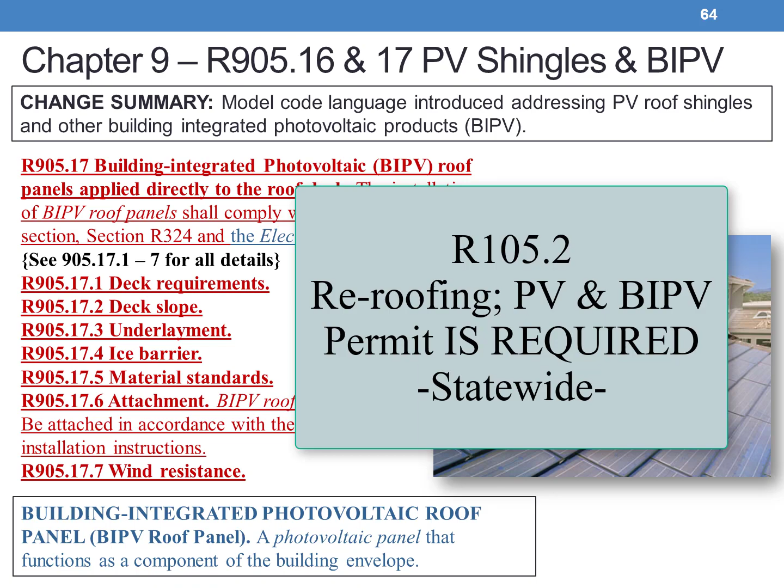Finally, a reminder for both BIPV and PV shingles is that now Chapter 1, Section R105.2 specifically excludes the installation of these products under the re-roof permit exemption, meaning if a customer wishes to add these products to an existing dwelling, a building permit is required statewide.

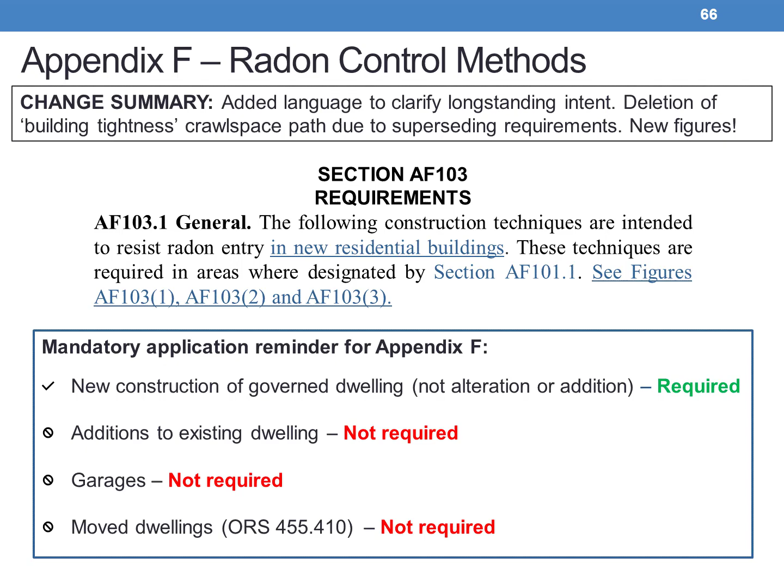Another great addition here are the revised illustrative figures. Note the pointer at the end of AF 103.1 to these 3 figures.

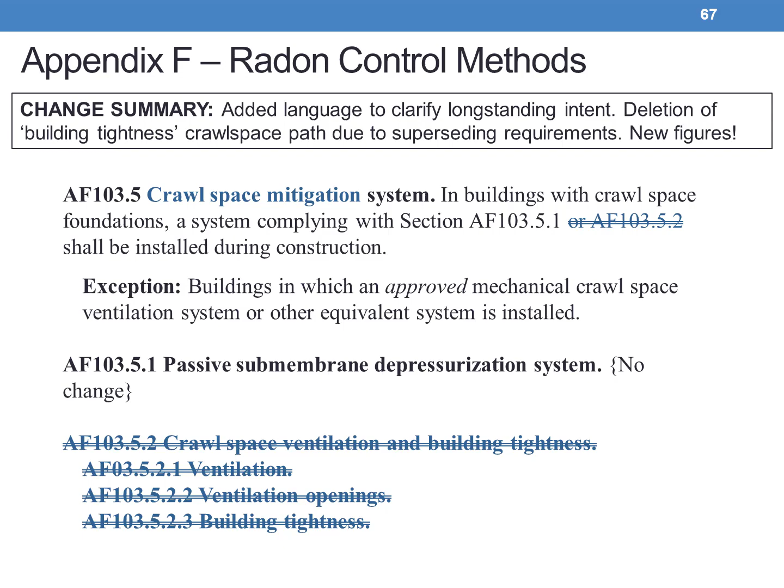Next, we have an amendment deletion in this appendix. The building tightness path, which was originally an Oregon Amendment option, has been deleted due to superseding requirements. In particular, the ACH 50 provision was out of alignment with the 2021 ORSC Chapter 11, and the duct language was problematic as well. This conflicting language has been removed, aligning us more closely with the model code language regarding radon mitigating construction. You'll hear more about the Chapter 11 requirements in the separate code update training video.

Appendix T, dwelling unit fire sprinklers. This change includes Appendix T being rescinded and replaced with a reference to NFPA 13D. NFPA 13D was historically an acceptable trade-off to Appendix T. Appendix T, as it was in the 2017 ORSC, was based on the Model IRC Section P2904.

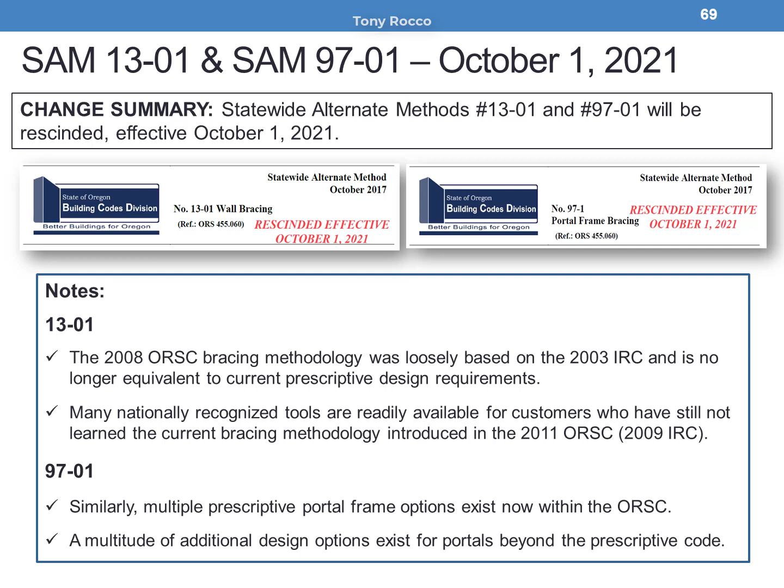All right, so we've made it to the last technical slide on this part of the code update training. While not an actual ORSC change, this is a significant peripheral consideration to be aware of. Statewide alternate methods 13-01 and 97-01 will be rescinded as of October 1, 2021. In the near future, look for the associated docs to be updated on our webpage with a red line identifying the rescinded effective date.

The lateral bracing SAM 13-01 has served its purpose as we bridged from the 2003 IRC to the 2009 IRC. As you recall, this method was loosely based on the 2003 IRC and is no longer deemed equivalent to current prescriptive lateral requirements. As such, the advisory board approved removing the option once the ORSC grace period had concluded.

As a reminder, the grace period for the ORSC is 6 months this time around. This is reflected in the associated rule, and during this time, both the 2017 construction standards and the 2021 construction standards are acceptable options for the customer to choose. Many nationally recognized tools are readily available for those customers who have still not learned the current bracing methodology introduced in the 2011 ORSC.

R602.10 becomes further refined and clarified with each iteration and is a flexible prescriptive approach once folks become familiar with it. Similarly, the old 97-01 portal is now superseded by multiple prescriptive portal options of the ORSC. Not to mention, there are many proprietary portal systems which have achieved code acceptance testing and reports. Outside of the prescriptive code, there are countless options for the customer to consider in their design.